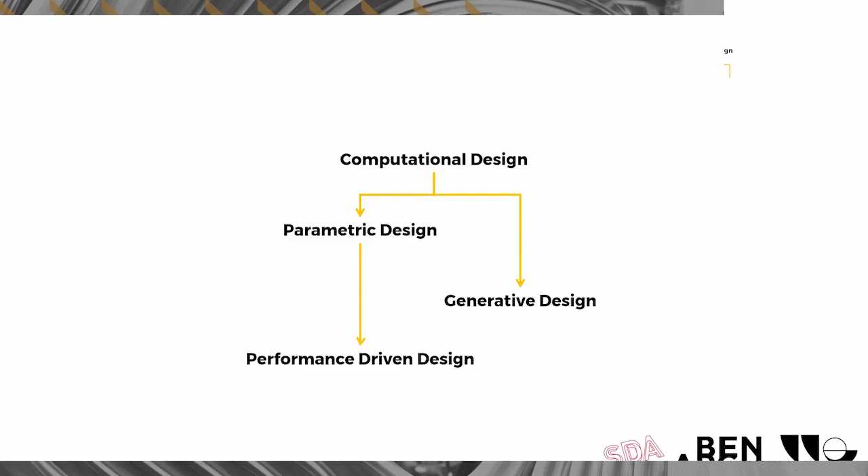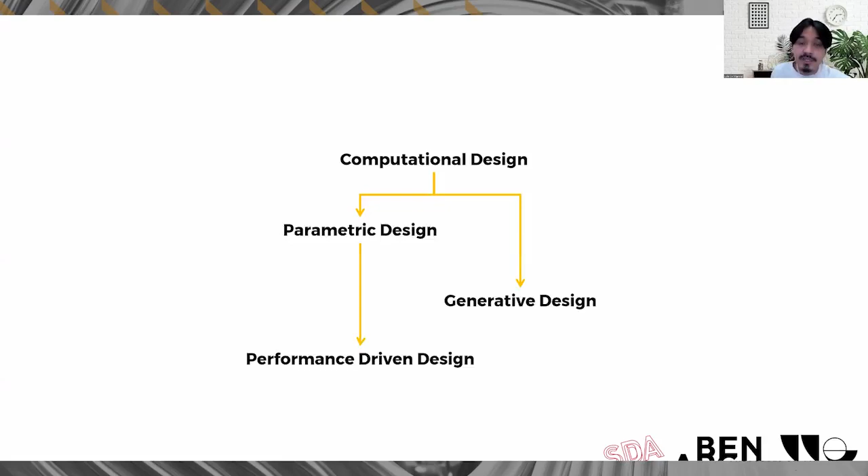Computational design can be subdivided into other computational design parts: parametric design, generative design, and performance-driven design. We will discuss the definitions of each.

But what is computation? What is computational design? It is not magic. It is not a computer software wherein you input something and then something amazing or awesome comes out. That's the connotation people have with computational design or parametric design - fanciful architecture, very complicated. But computational design is not that.

It's not magic. It is still based on you as a designer, your imagination, your process set into an instruction. Computational design is an instruction-based design. What do I mean by that? This is algorithmic modeling. Algorithmic modeling, from the term algorithm, is about instructions. So you have a set of instructions that then produce a certain design.

If you look at this, this is the script for the Morpheus Hotel by Zaha Hadid. It's not like it was just designed on a 3D modeling software. There are certain parameters that were given and certain instructions that they follow to produce a certain design. When you read this, it is from left to right, like reading a text. So as one component translates a parameter, a line, or a drawing, it then passes on the translated information to another component. So those translations then create this.

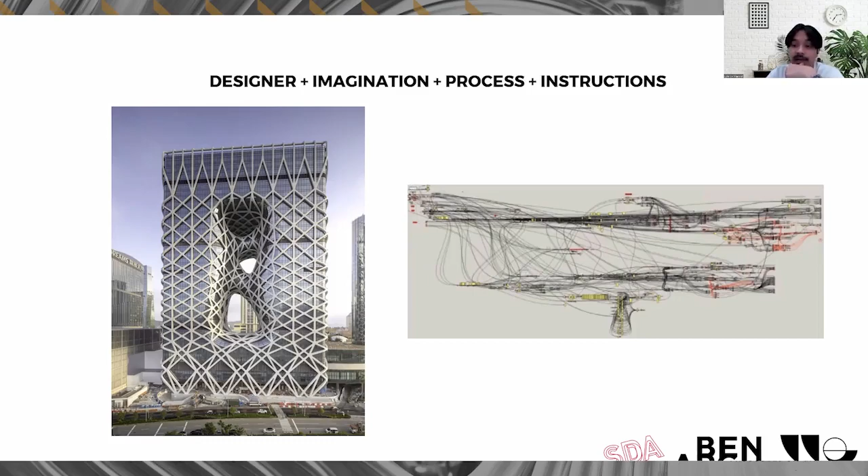So the kinds of computational design are as follows. Number one is parametric design. Parametric design is an interactive design process that uses a set of rules and input parameters to control a design model. So in this case, as you can see, this is the visual script, in Grasshopper, and this is the design. The design now can be modeled and edited through the use of these parameters.

The parameters are project-specific values that define the design model, like dimensions, angles, and weight. So what you're designing basically is this script, this set of instructions that then produce this drawing. Since you have designed the script, you are now able to tinker with all of these parameters to create unique designs.

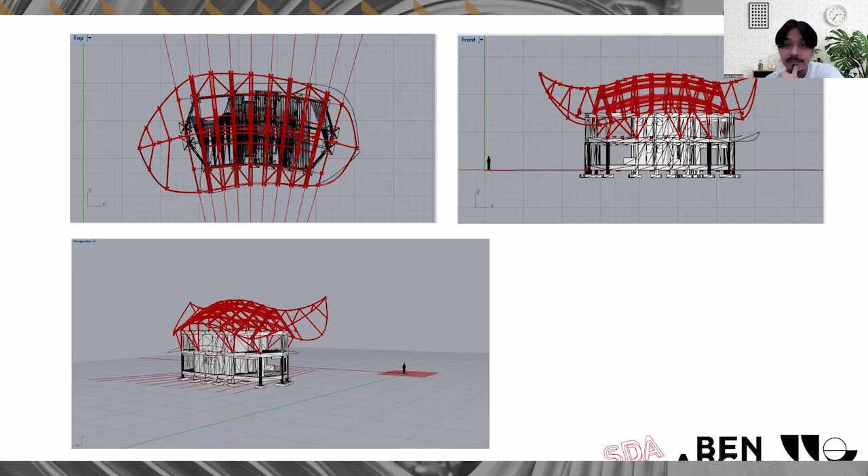So this is a more complicated one. This is another project in collaboration with Sangay Architects. Here, they already have a frame. But what happens is, when you show the structural engineer a model or a design, what you need is just one line drawing, so they would extract one line.

That line would represent a group of bamboo. So in designing bamboo structures, to make a member bigger or stronger, what you're going to do is have more poles. In this case, there are members with 4 poles, members with 2 poles, and members with just one. So with traditional 3D modeling, imagine a certain point.

Imagine one point, so this is a line. You need to make 4 poles. Now those 4 poles should follow this point because this is the point of reference, right? So if you move this in a traditional 3D model, you move it, you move all of them, one by one or as a group.

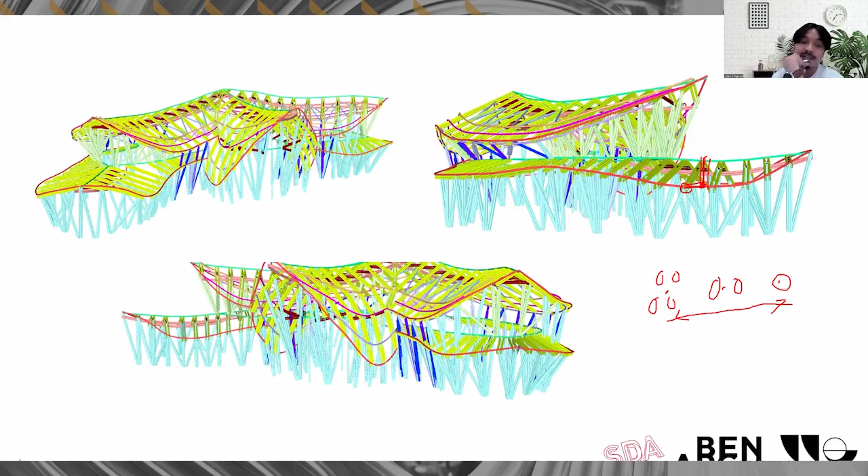It's an easier way of designing, but easy in a sense na pagtapos mo na yung script. During the process, you are designing the script - how the script would think, how the script would manipulate data, and how that data will be translated. But after that, after you have designed that, you have the free will to redesign your project based on that certain script. And that instruction is project specific.

So in this case, we were able to design this and change the number of poles. We will be able to change where those poles are located, and hindi na kailangan i-model lahat. Also, we can also define kung ilan yung mga members.

So in this case, pwede natin siyang i-divide into 10, or pwede rin siyang i-divide into 4 lang. So instead of this having 10 members, pwedeng 3 lang siya. So it depends on the parameter. But still, you're just moving sliders there. You're not anymore modeling manually.

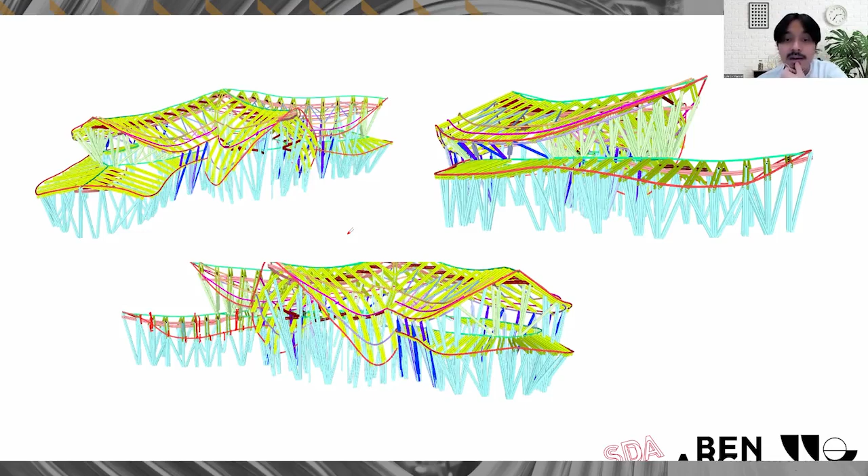So you're modeling parametrically, which is an easier way of modeling complex geometries. That's why ang connotation of parametric design is complex geometries, because it is so difficult to 3D model complex geometries. But it's easier to 3D model complex geometries through parametric design or parametric modeling.

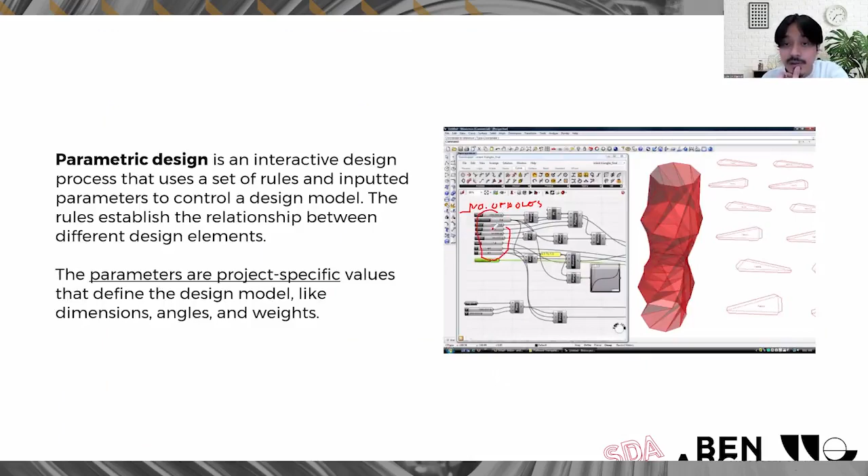Another branch of computational design is generative design. So imagine yung mga parameters na to - you have hundreds, if not thousands, if not millions, of different designs because of those parameters.

So in generative design, what we're doing is to create iterations of that certain algorithm or that certain script. But we would have a requirement, a design requirement. For example, we are doing performance-based modeling. Ang mangyayari nun is, there's a certain parameter wherein yun yung favorable for us. And using iterative design or generative design, we will generate all of the possible iterations and choose which one will be the best for our design.

So in definition, generative design is an iterative design process that uses user-defined inputs to produce multiple design concepts that meet specific goals. So the inputs are rules and parameters that define design requirements, which is similar to parametric design, because this is parametric design. The difference is we're automating the generative process.

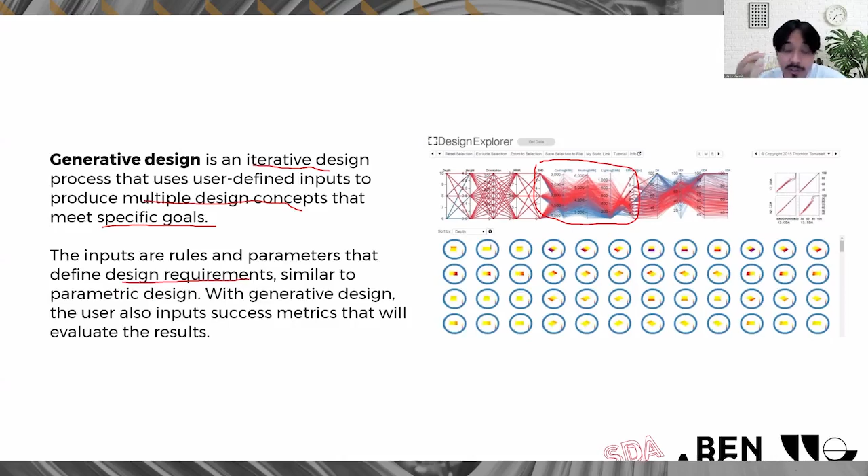So with the generative process, with generative design, the user also inputs success metrics that will evaluate the results. So these success metrics will define kung ano yung gusto nating makita sa design. I will show you examples later.

Performance-driven architectural design emphasizes an integrated and comprehensive optimization of various quantifiable performances of a building. Medyo wordy, but siguro this would help you out. So you have an input and you have an output. Input can be environmental data, climatic data, or daylight, or whatever. You have also your building, or kung ano yung i-simulate or i-analyze.

So what happens is, first we input the parameters. Number 1, climate data, geometry, which is ito, schedules and loads, louvers, blades, definition. Ito is yung design ng facade.

Louver blade definition. Step 2 is to do performance simulations. So with this design, for example, ginalaw mo na yung parameters mo. Balik tayo dito. Ginalaw mo na yung parameters mo here. So meron ka ng design. Ito, right?

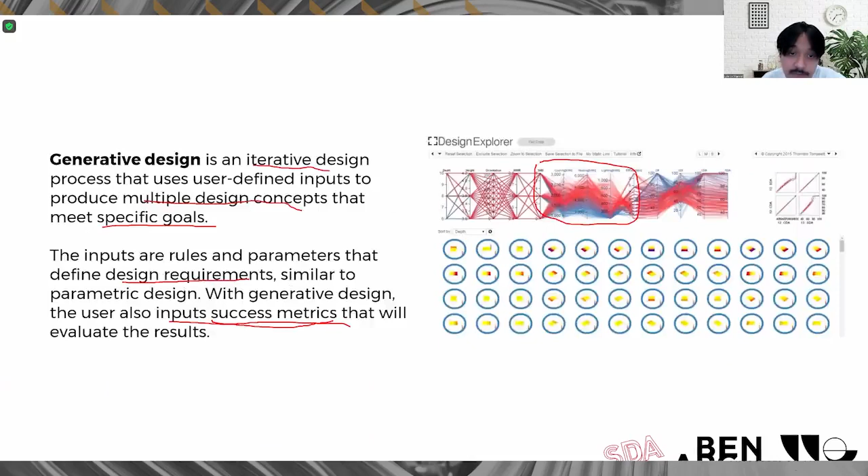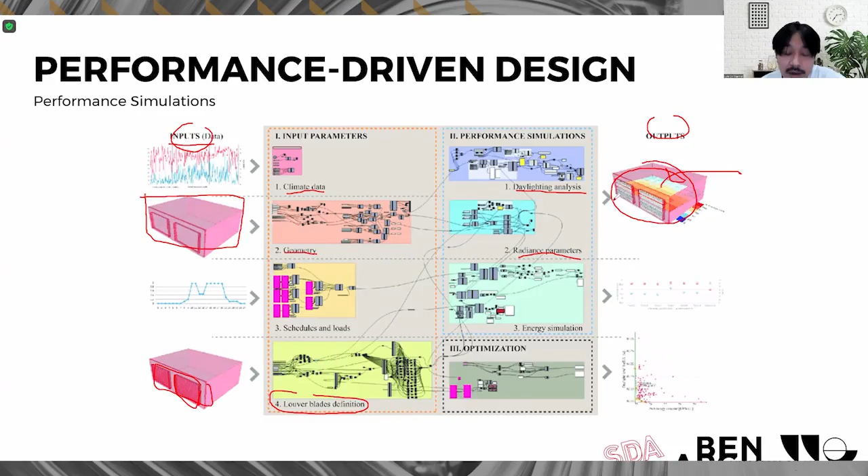Then you will now test that design if it performs well. So we'll do daylight analysis, radiance parameters, and you will have an output, which is this. Based on this, you would now assess if you are okay with the output values na analysis. If not, you have to change the design.

So you will move again the sliders and you choose which one is the best, which one produces the best output. And after that, there would be energy simulation. So in this project, there will be energy simulations and optimization.

So for the optimization process, you can use generative design again. How? You will now tinker with all of the parameters here using the generative design process, and it will generate all of the iterations possible using all of these parameters.

But since meron kang metrics, performance metrics, pipiliin mo lang aling output ang gusto mo makuha. Because there will be output na sobrang dark nito, there will be output na sobrang bright. But then you would put what kind of parameter would you want to see, and dito lalabas yun. So you are now collecting the best output out of all the iterations possible.

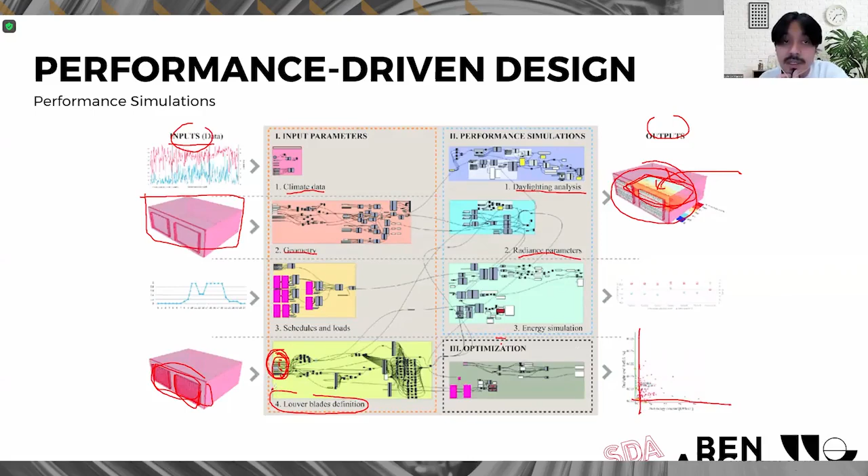So that's performance-driven design through generative design models. Another example of performance-driven design is using sun path analysis and solar radiation to determine what kind of facade would help you reduce your solar radiation.

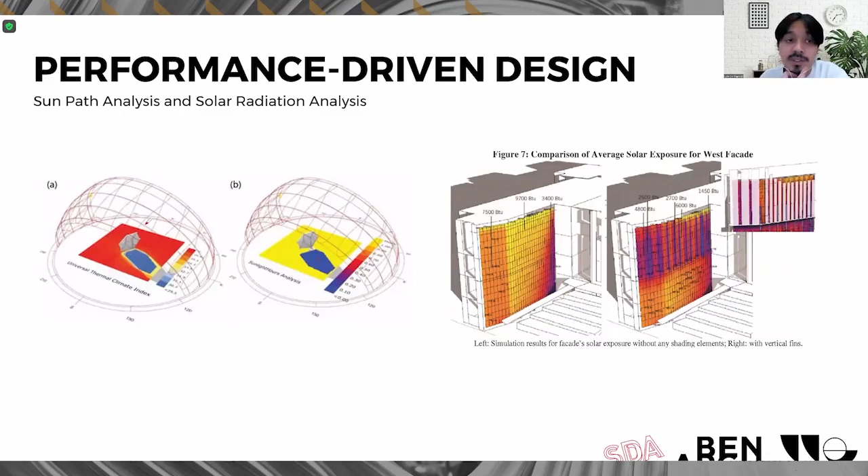Or if you're using solar panels, you can now use the sun path analysis to know what is the best orientation for your solar panels. So in performance-driven design, these are the processes: Number 1, information gathering. Number 2, digital design models - so you have the design concept, and you have the simulations, and then parametric form finding.

These are the different softwares that you can use. In design concept, we have Rhino, Revit, 3D Max, Maya. But for computational or parametric design, Rhino and Revit are better. They also have specific visual scripting software: in Revit it's Dynamo, and in Rhino it's Grasshopper.

The thing with Rhino Grasshopper, what makes it more ubiquitous, is that Grasshopper is open source, and you can access a lot of resources online. You can check a lot of forums where similar problems to the ones you have have already been solved, so you just look through the Grasshopper website and forum.

For simulations, you have Ecotect, Vasari, and custom spreadsheets using Python maybe. And lastly, for parametric form finding, you have Grasshopper, Maya scripts. In this case, it's a Perkins and Will custom Revit plugin. Dynamo isn't used here.

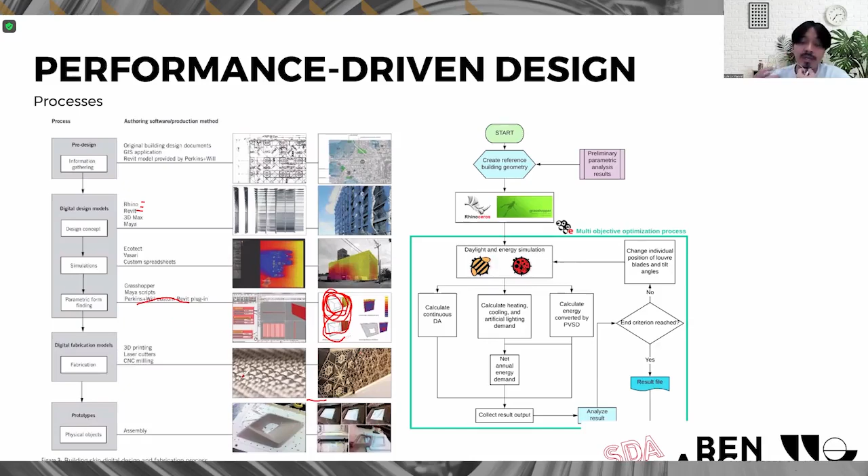What if the design changes? What if the set of angles is different, with very minute differences, then you'd have to redo all of that. It's difficult. So this is another thing that parametric design helps us with: producing those working drawings, to be able to produce the drawings and instructions for how you could assemble all of these things.

This is another project by IAAC, the Fab Lab House. They used performance-driven design also, using the sun path to determine the best and optimal location of the solar panels. In the Philippines, it's like this: wherever the sun rises and sets, that's where we orient it.

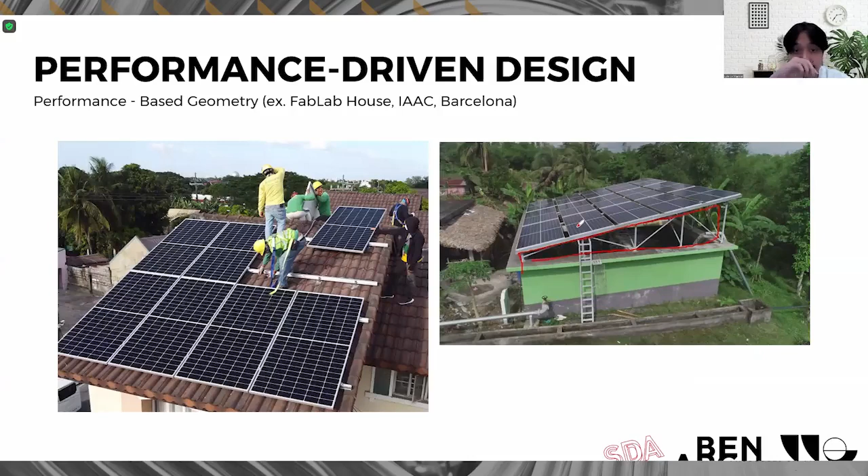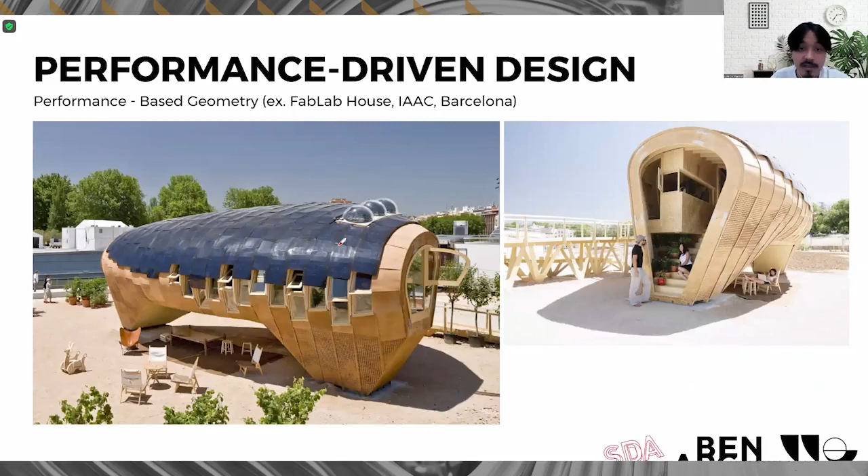Or, if that's not possible, we will fabricate a very linear assembly so that it points directly to the sun, following the sun path. Here, what it does is create an optimal shape where you would be able to capture all of the sun rays at all times of the day. This shape was determined by a script.

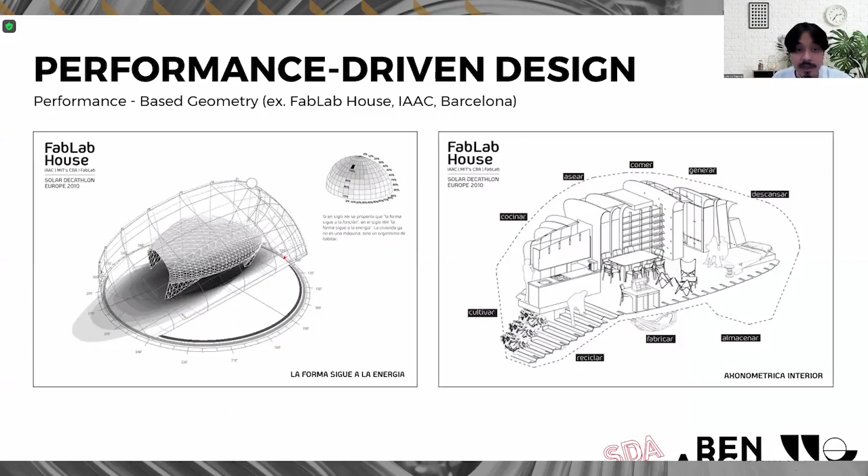That's where the solar panels are placed. We are in the fourth industrial revolution. It's about data, data, and data. And the problem with the design and construction industry is that we're lagging behind in using data as part of our design process and our construction.

And if we do not follow this trend, we'll be left behind—not because we're just following trends, but because the pace, accuracy, and precision that data would be able to give us, we won't be able to get otherwise.

Okay, now I'll be showing you some examples. Some of these are works of my current students, some are from friends who are alumni of Benilde, and some are my own work.

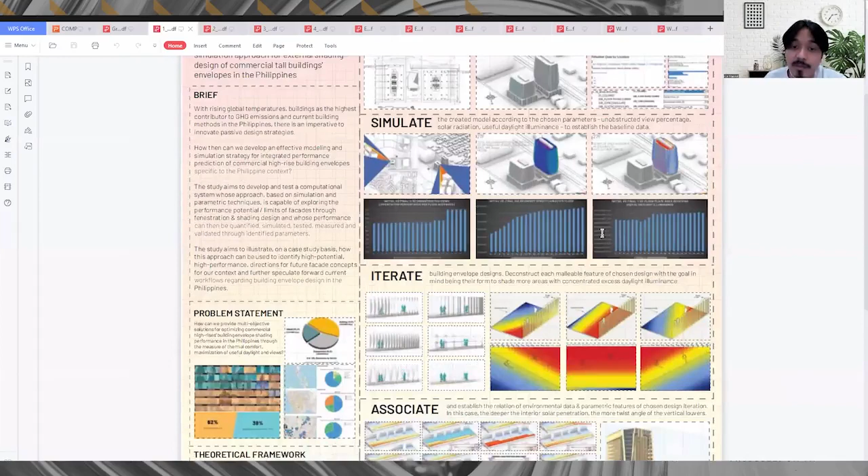This one is a thesis of an alumnus, si Noel Narciso. What he wanted to create is a performance-driven design thesis. He is designing a facade which follows environmental simulations.

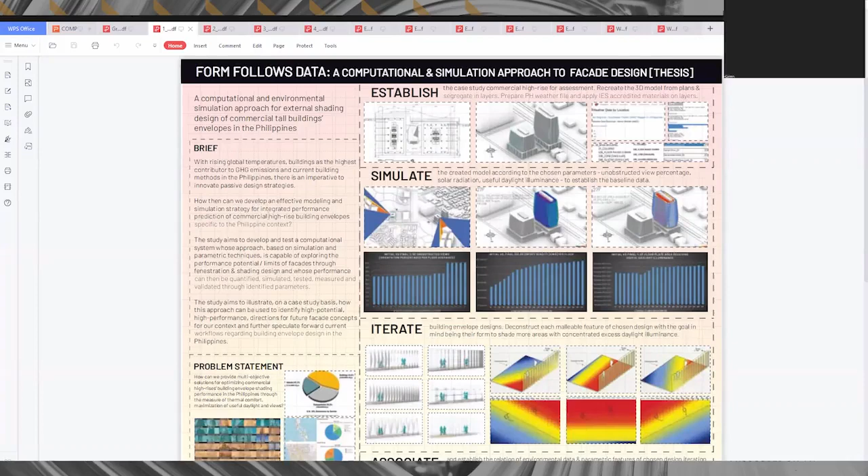So dito, ang brief niya, let's read the brief: with rising global temperature, buildings as the highest contributor to greenhouse gas emissions, and current building method in the Philippines, there's an imperative to innovate passive design. The question is, how can we develop an effective modeling and simulation strategy for integrated performance prediction of commercial high-rise building envelopes? So this is in relation to facades or building envelopes.

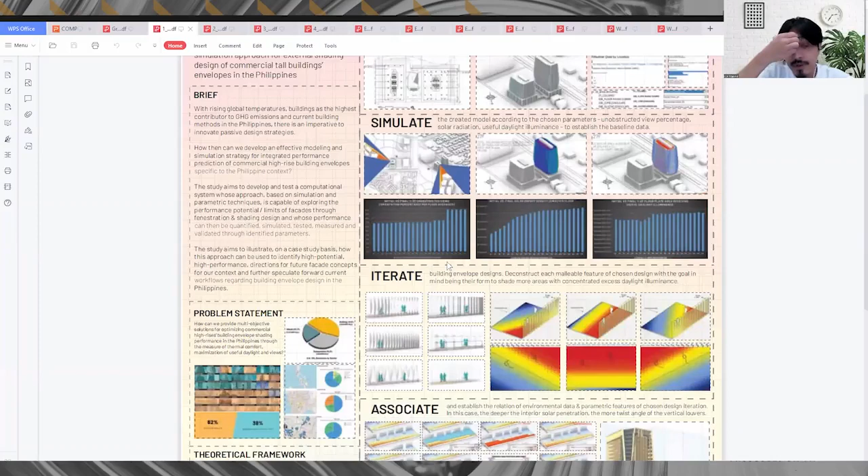Para siyang computational design brise soleil. Yun siya. So the brise soleils before, they're very passive in the way we have designed them. Diba? Parang maglalagay lang tayo ng mga brise soleil. Yung depth is dependent on us, on the architect, kung gaano kalalim. But not much is done when using actual data from climate data. So dito, ang pinapakita niya is you can do that and you can automate that process as well.

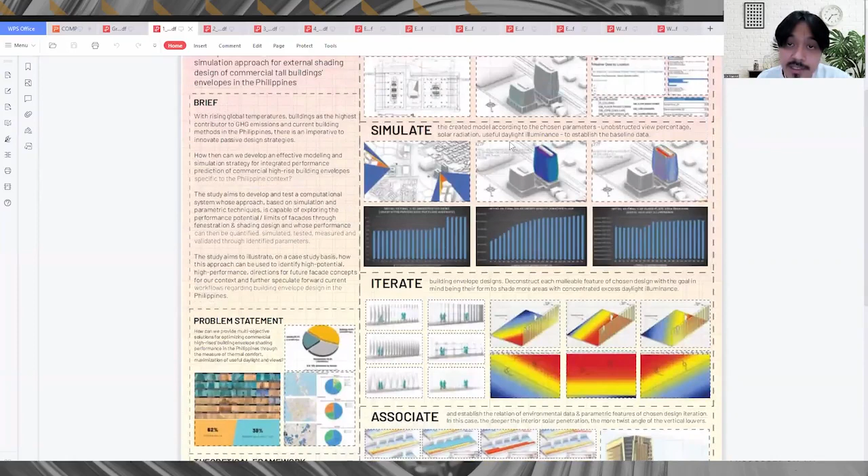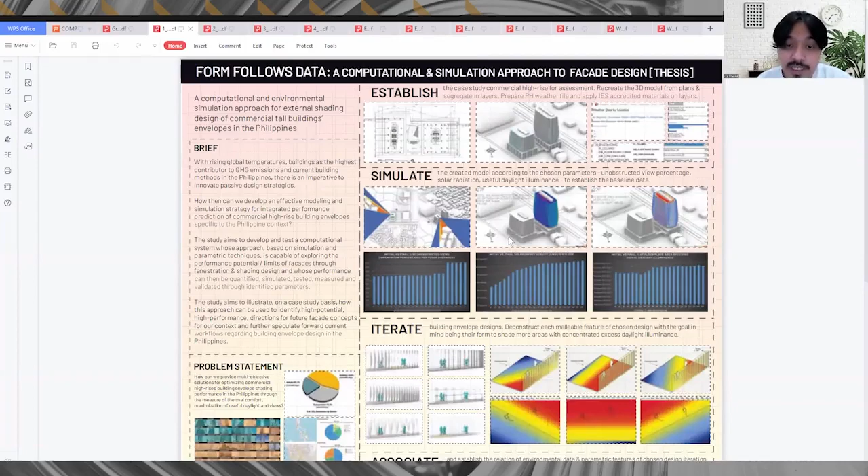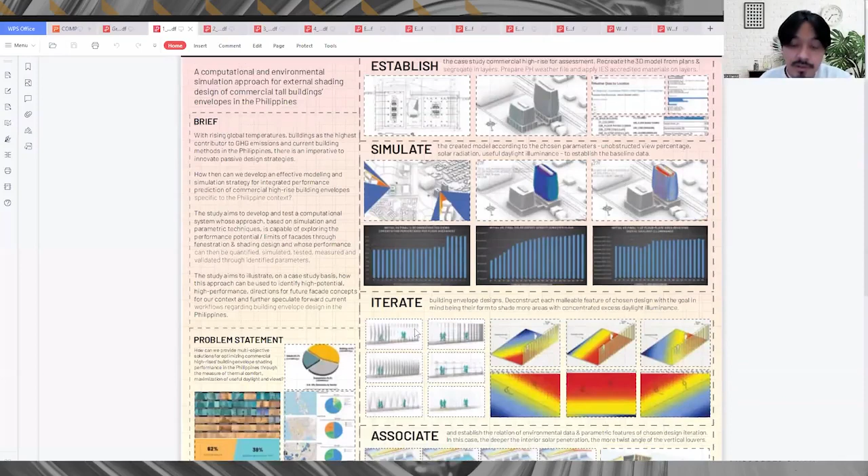So in his process, he has established yung model, parang yung kanina na pinakita ko. You will establish the model and you will simulate. Una, without the brise soleil. Second, what design is best fit for this simulation? So in this case, nag-design siya ng different iterations and different designs, and by using those designs and different scripts, he simulated what would happen if you would use them.

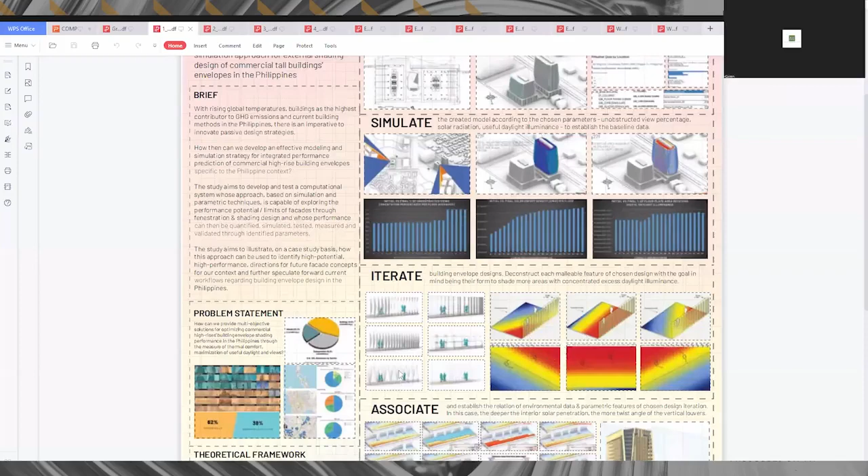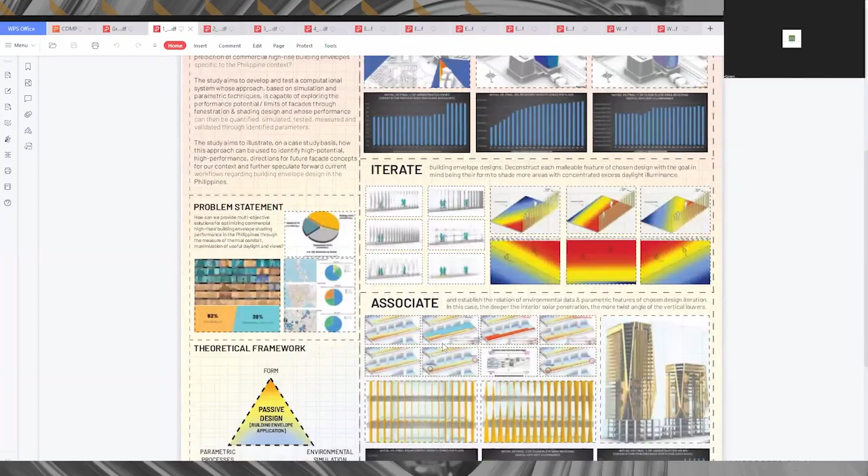So based on his simulations, may kita mo yung mga figures. Kumari ito, this is very hot. Ito relatively okay, mas konti yung red. And through that, he was able to create a design that is the most efficient in terms of where the building is located and kung saan siya naka-orient.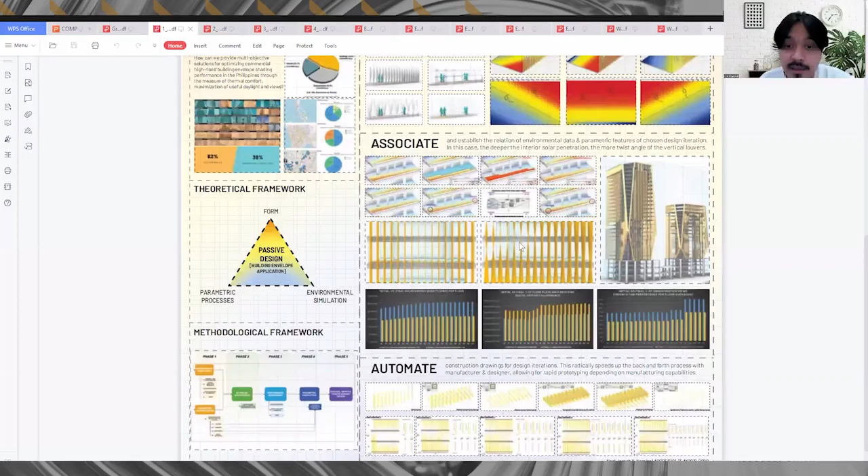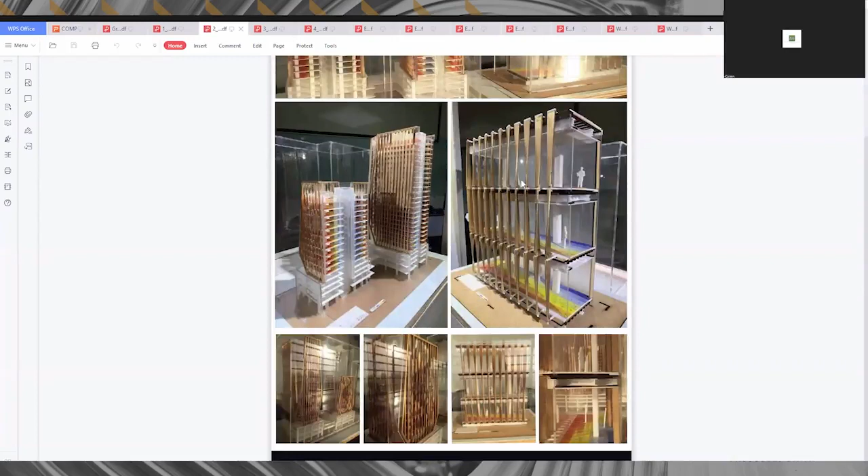So this is the design of that. By also using Grasshopper, he was able to 3D print and model accurately kung ano talaga yung nasa 3D model niya. But since those data are there already, madali na lang yung process na yun. So you can see the bends of the facade.

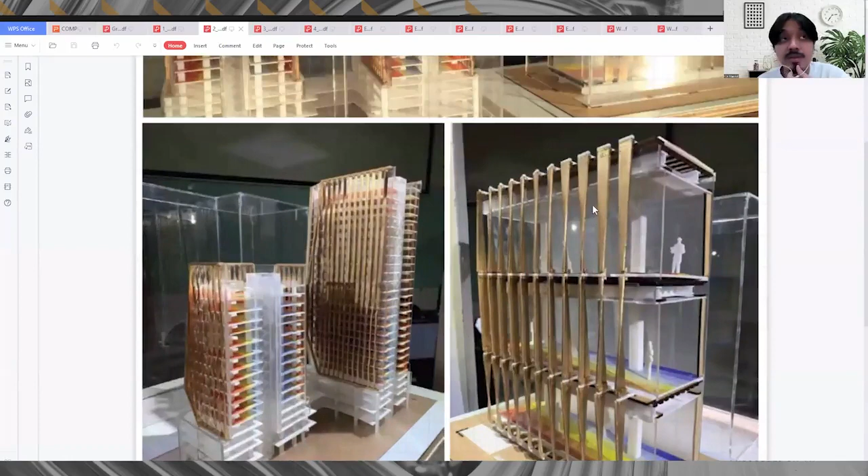You can see the bends. This will be difficult for a normal worker to replicate. I said this is accurate to the data, so any deviation from this design, may deviation din dun sa result. Na ito kasi yung result na gusto niya, diba? So kapag binago mo yung shape na yun, magbabago din to. But then we don't want that because we have already chosen a certain design.

So the best fabrication technique is to use a direct digital fabrication technique. Direct meaning from digital design to digital fabrication.

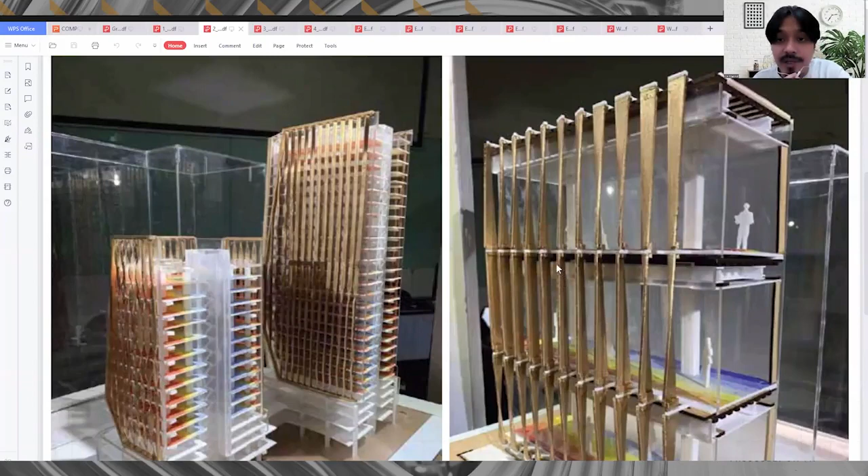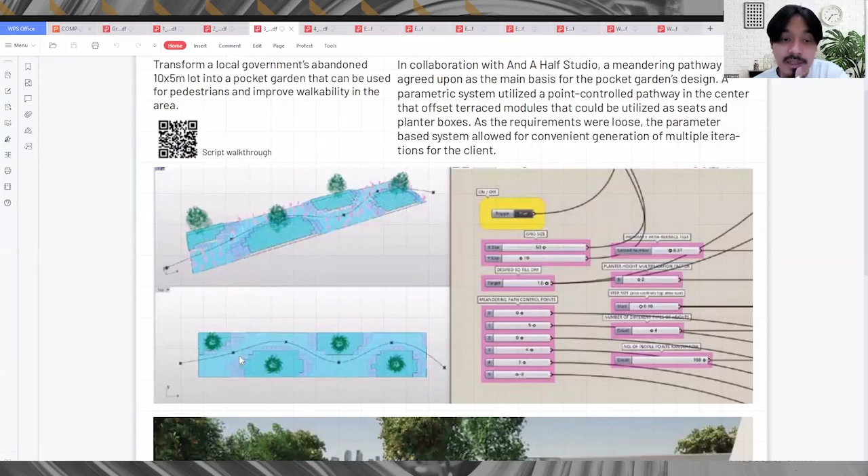Okay, another project is also from Noel. This is a collaboration with And A Half Studio, a pocket park. So this one, it's fairly simple. You have all of these parameters, and you have this line that would represent where the people or the pathway is. And the pathway now creates a void. So meron siyang mga shapes here, mga boxes there that would determine where the planters are.

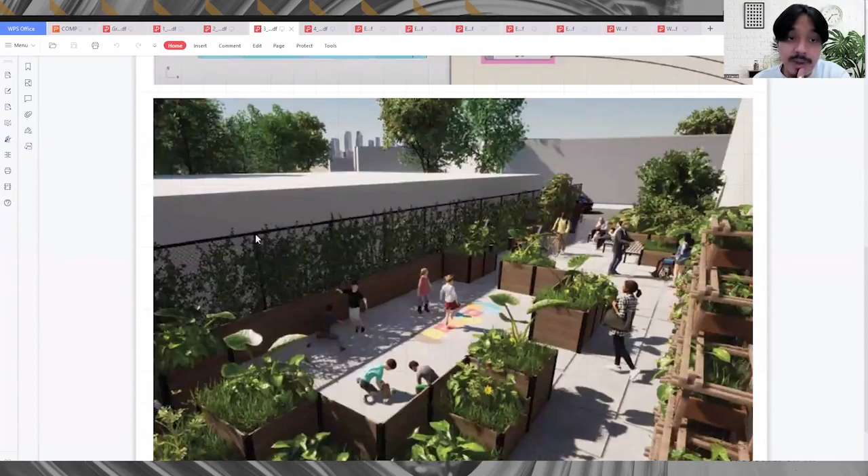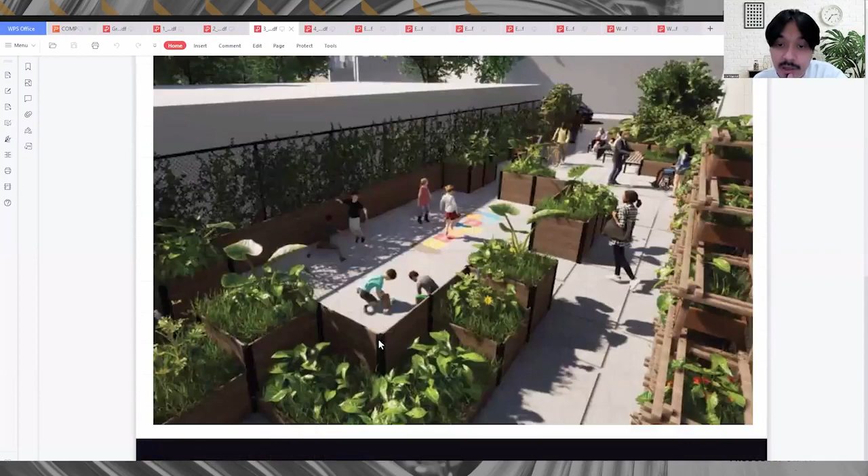So ito siya. Then yung path yung pinaka that would determine where the voids would be. Okay, these parameters he will be able to edit, for example, kung gaano kawide yung mga path na to, or gaano kalalim, or gaano kalayo from these trees. So it's easier for him to design that.

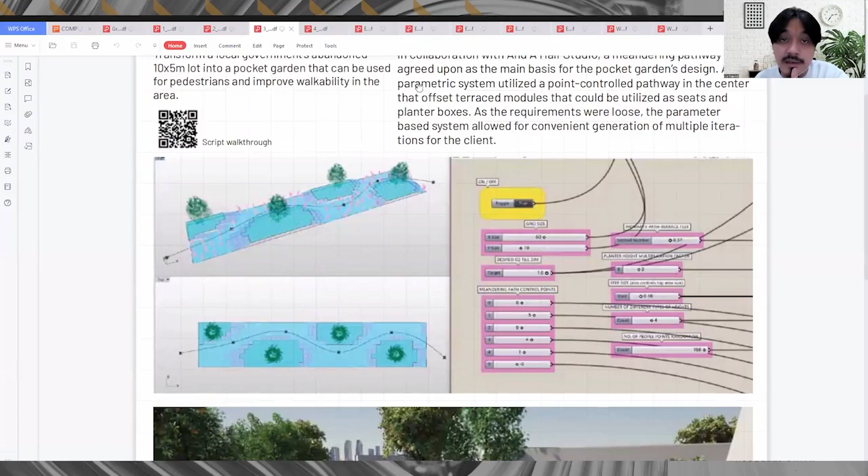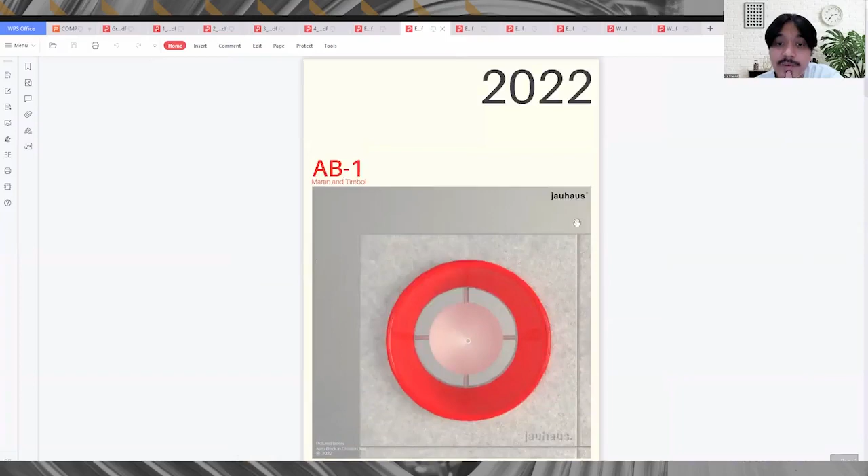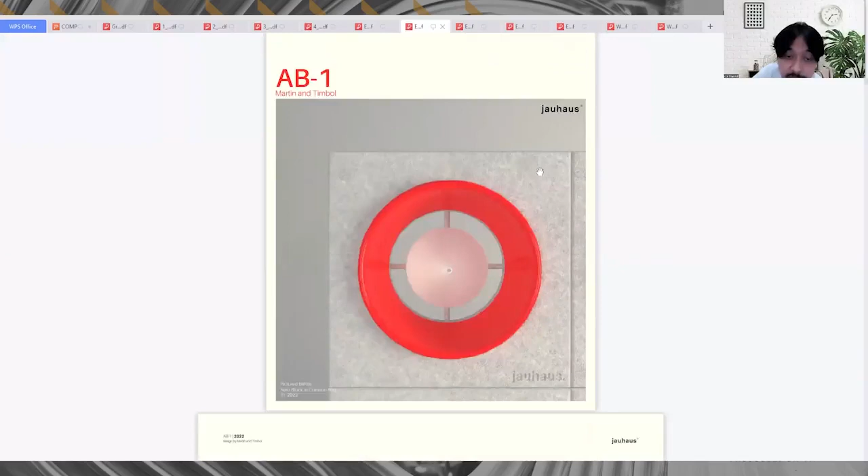Some renders. Okay, this is from Emerge, I think this is Emerge 2. Dito naman he used, but it's not shown here, Martin and Timbol - they used computational fluid dynamics to design an aero block that would passively cool an area.

So these are the iterations. Hindi nila pinakita dito yung actual CFD testing. CFD is computational fluid dynamics. But they have come up with - they were able to determine which one of these designs is best for what they want using computational fluid dynamics. Makikita mo dun sa simulation nila kung alin yung parang nagko-cool ng room the most.

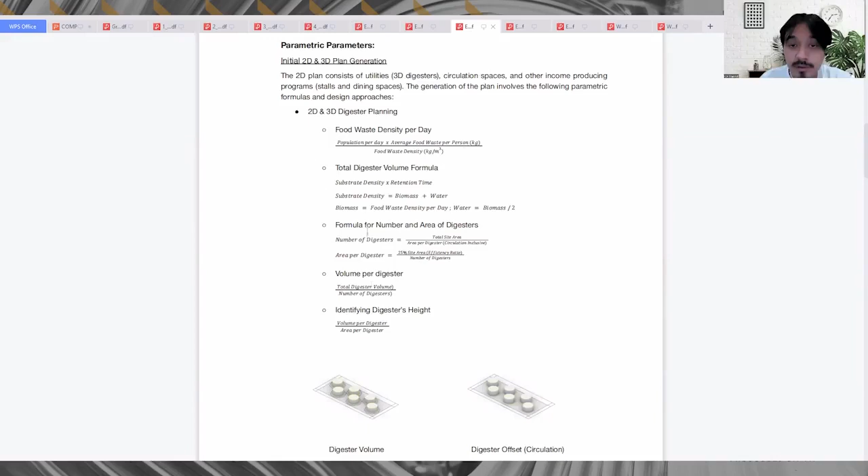This is from Emerge 2 also. This one, they're designing a palenque with a food digester as their source of energy. What we wanted to do is to create first the parameters that would determine the volume and the number of digesters and the amount of energy produced - ito yung mga computation nila. So all of these are translated into parameters. This would determine the size and shape of the design.

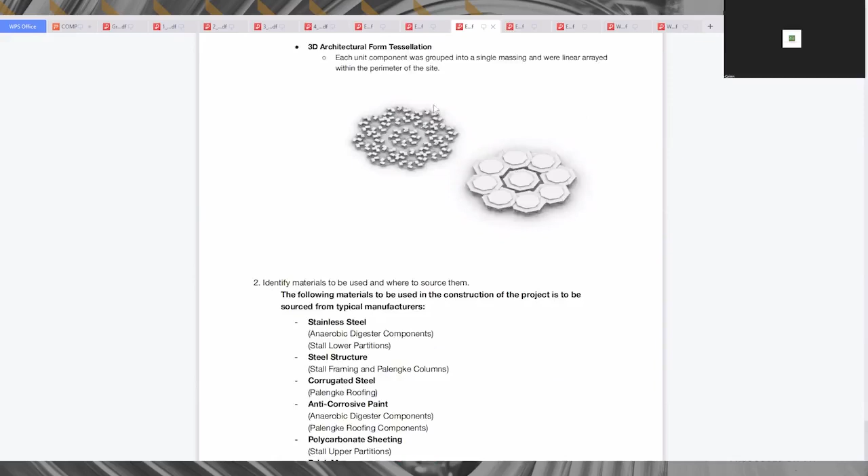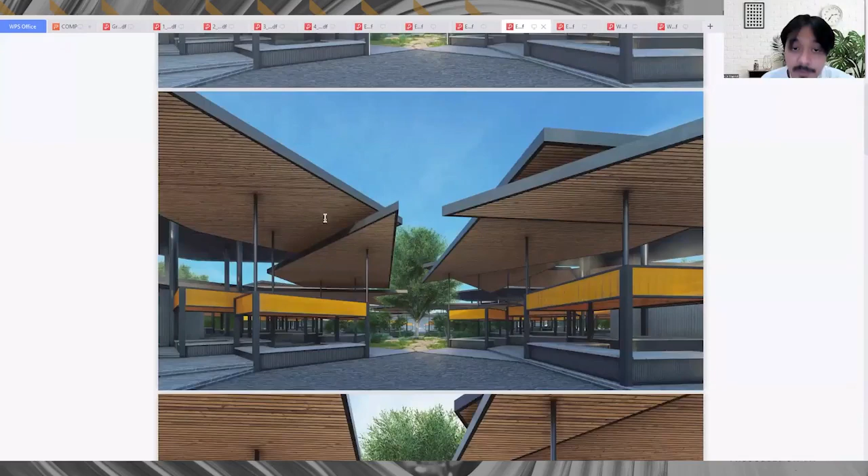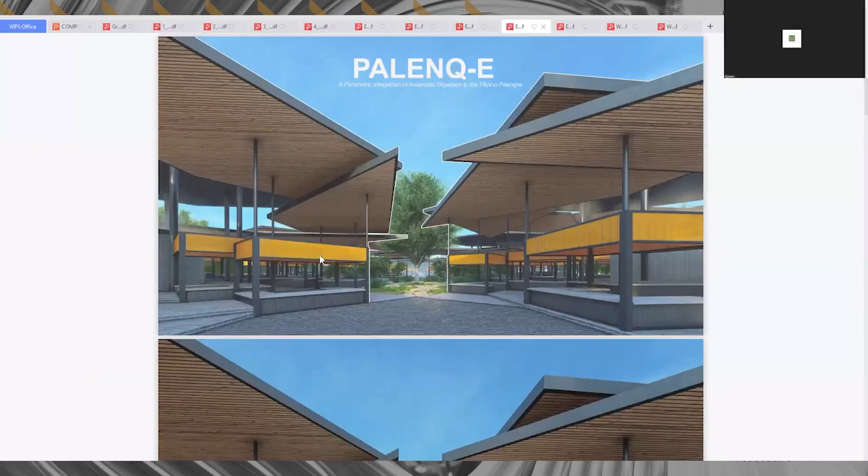So these are the renders. So the parameters here are number 1, the population, and then the digester ratio, area per digester. So these are the formulas they used - food waste density per day, digester volume, volume per digester. There's a formula behind that. And also the sizes of the stalls, the height of the stalls, and how these roofs would be oriented.

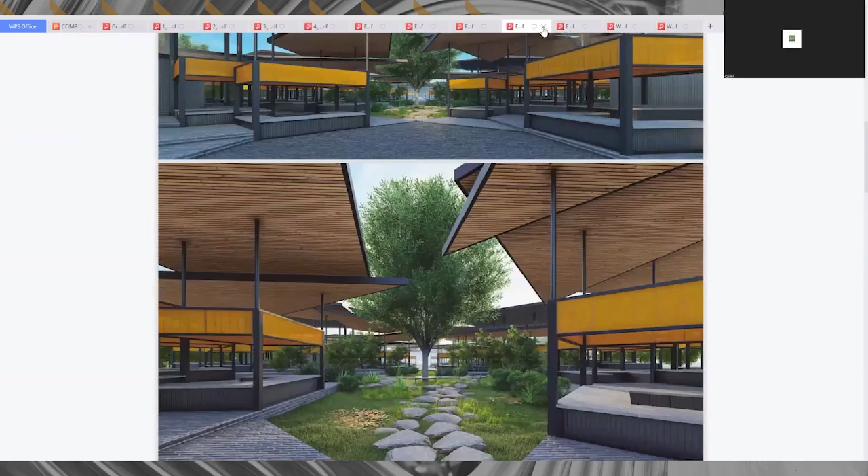Next is this step. This is a conceptual algorithmic design on integrating active play and circulation in kindergarten schools. This is a more planning approach, or a parametric approach in planning design. So they researched different simulation and algorithmic planning techniques.

And the most important thing here is you cannot create a script without knowing how to model a design. What I mean by that is if you cannot model it by yourself, you won't be able to do the script - that's because you are designing the model as you are designing the script. The script will help you automate certain things, but it will not design for you.

So in this case, if you're going the path of parametric design, what we do is break down the design process and put them into individual instructions. So in this case, input lot coordinates, setback, building space, and orientation. From those, you will be able to create building space. The spaces are defined by input of students, input of class capacity, and the spaces also have adjacencies, which are then oriented through different orientations based on the lot. And then you can create the number of floors, floor priorities, etc. That would then create the process, at least the conceptual process on how to design this structure.

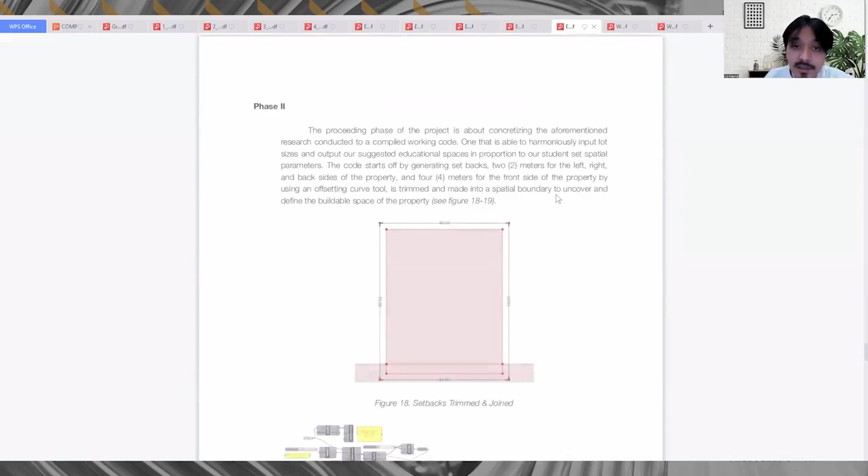This is their process showing you different tabulations and different parameters that would help them determine adjacencies and sizes. This is their script, the code for the setup already.

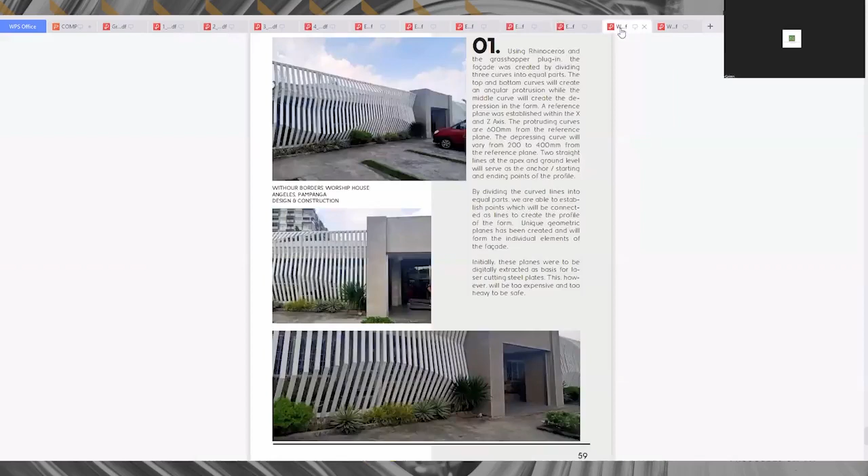This one is a personal project of mine. The difficulty with designing digitally is you cannot, especially with our technology here, always do digital fabrication. So the problem is the manual translation of digital design, especially for designs that need to be accurate and precise, like this simple facade. It's simple when you design it. It's simple when you model it. But in actual construction, it is very difficult for you to fabricate these kinds of designs with what we have here in the Philippines. So what happened was, initially when we did this, it's just a grasshopper script.

It's a simple grasshopper script - I didn't include it here. It's just a curve subdivision, and then you're connecting all of those lines from those subdivisions. And the curve is dependent on you, on whatever you want to design. That's it, it's a short script.

But then what happened is, when you showed the designs to them, the first thing I was going to do was put in the angles and lengths of those lines. But what happened was it wasn't as smooth as how it looks right now, because there are deviations - minute deviations, imperfections of manual craftsmanship that show when you zoom in.

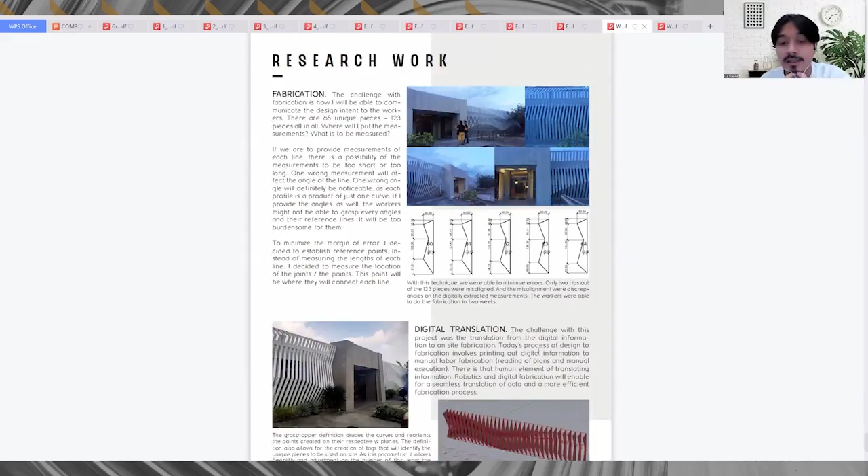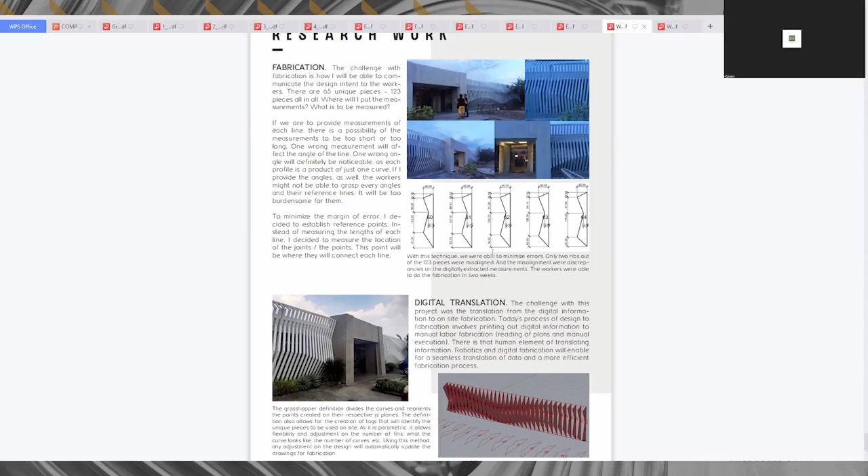So we used Grasshopper to extract all of those points. It's difficult if you extract them one by one and draw them one by one - you'll already make mistakes there. So what we did is automatically extract all of those points.

Another example, and the last one, is performance-driven design. This is a sneak peek of what Xavier Tixon, also an alumnus of Benilde, is doing for Arcadis. This is on a corporate level. So they have climate visualization, solar heat analysis, wind and CFD analysis, and illuminance. And these are the plugins that they've used - basically Rhino Grasshopper, and these are the plugins they use.

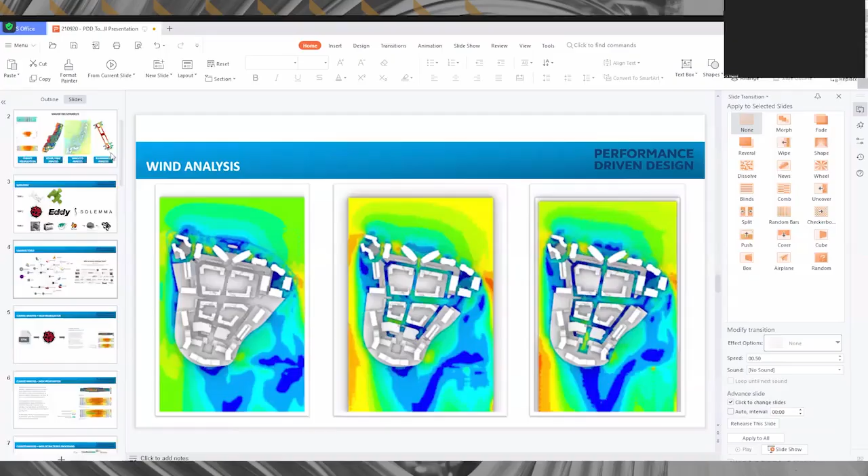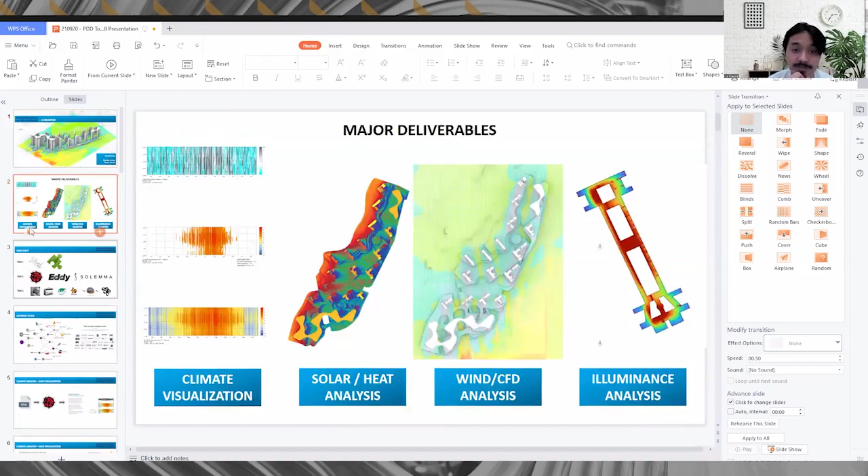Ulitin natin. So this presentation is sent to me by Xavier Tixon. What we wanted to show you here is the performance-driven design. This is on a corporate level, so this is for Arcadis. They used Rhino and Grasshopper and the plugins behind it to do climate visualization, solar heat analysis, wind CFD analysis, and illuminance analysis.

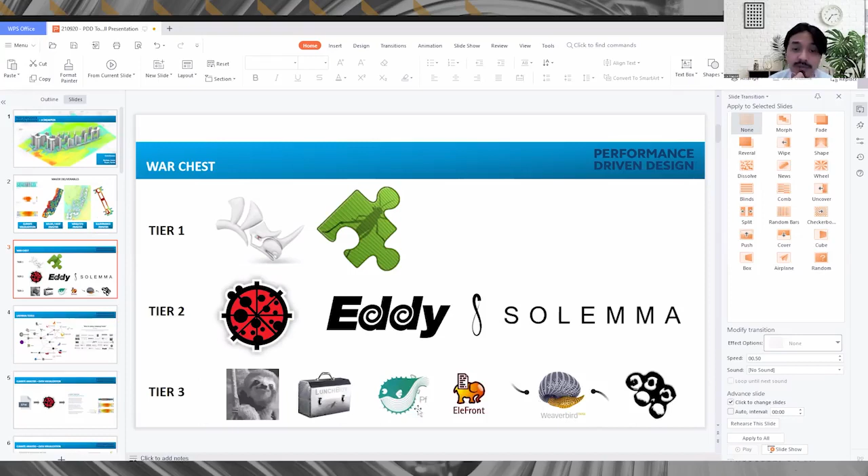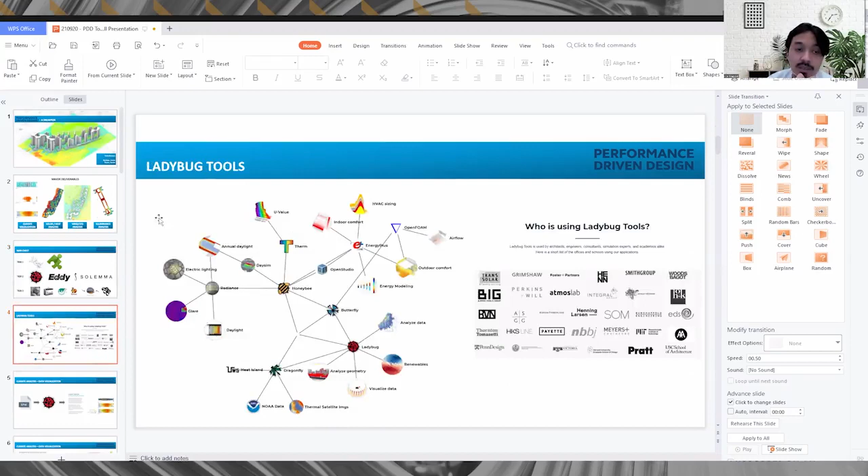So these are, he divided into 3 tiers. Tier 1 is yung Rhino and Grasshopper. Tier 2 is yung climate analysis tools, and this is the extraction of climate data. Tier 3 is more for the 3D modeling, so we have Lunchbox, Weaverbird, EleFront, Pufferfish, etc. These are the tools within Ladybug that would help you get certain data and use those data for your simulations.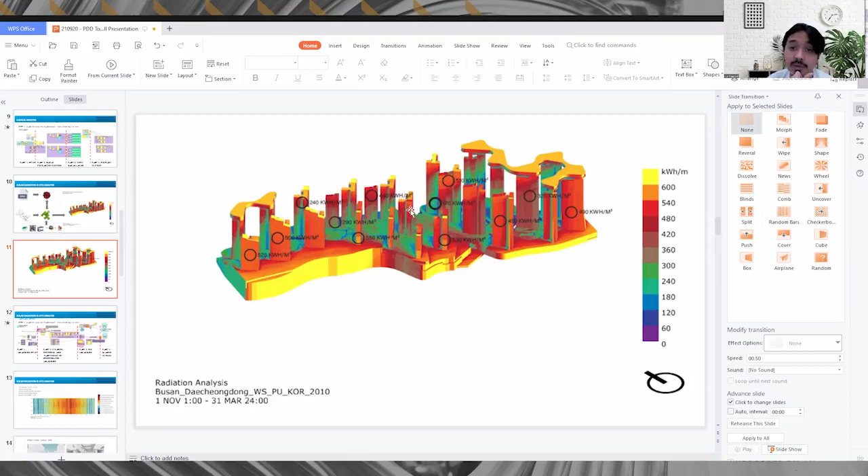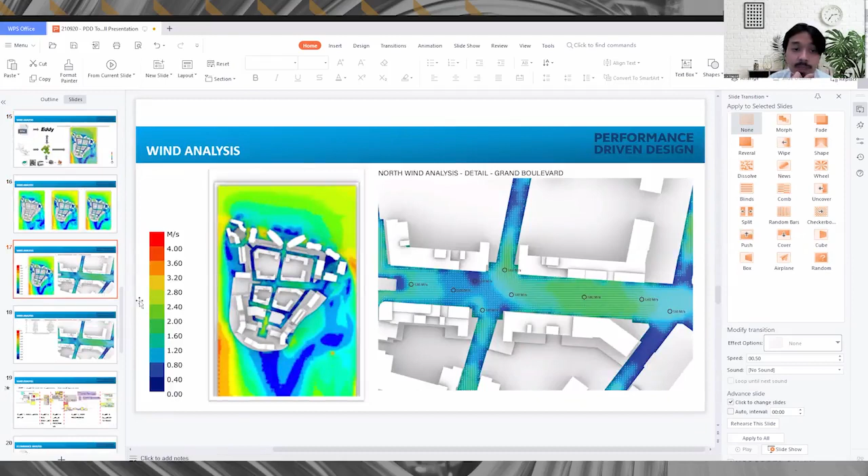Command is north wind analysis. This is more of wind analysis. So you can see the areas wherein there's high velocity and kung saan yung nagdi-dissipate yung speed, within the corners, ganyan, within yung mga escanitas.

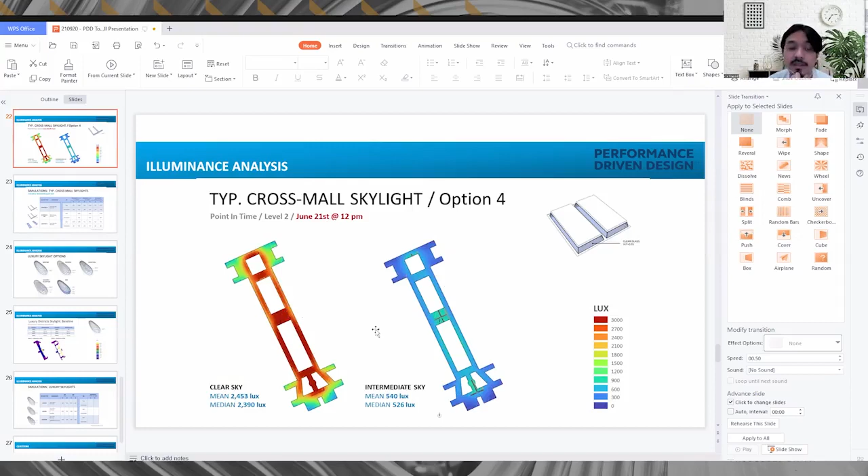And yung illuminance, how much light is going into the structure. With this, you will now be able to address which areas are dark, which areas are light, which areas would be needing intervention to add more skylights, saan sobra, and if you wouldn't want that, this would help you out with that.

Yeah, okay, so those are the examples. Next week, what we will do is we will try to explore, and I want you, yung mga nandito and would be attending next week, I want you to download una, so Rhino Grasshopper.

Next is you download this, the Grasshopper Primer. This is by ModeLab. This is, what I can say, the easiest to understand guide on Grasshopper that is free out there. So this can be downloaded. I can send this over to Sir Ven also, so he can distribute it to you, but this is free.

You have all of the different components, and they will explain everything. We will go through some of this next week. There's an introduction of what is Grasshopper, how to use it, yung UI. So all of these things we will discuss next week.

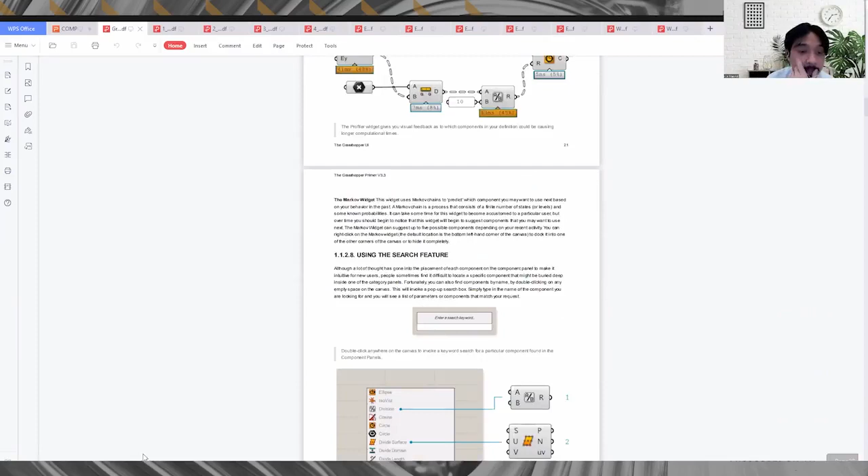That's it, do you have any questions, guys? I-email mo sa akin yan, sir, no? Sige, yes, no problem. I-forward ko sa inyo, sir, so that kung hindi nila mahanap online, okay. Mag-distribute tayo. But it's online, okay. Grasshopper Primer, sige, yes, sir.

By next week, they will be needing a computer, tama ba, sir? Yes, sir, a PC. Okay, so parang introduction and workshop next week, Grasshopper no? Okay, okay, as yung ModeLab as the guide, yung Grasshopper Primer. So they can ask me questions.